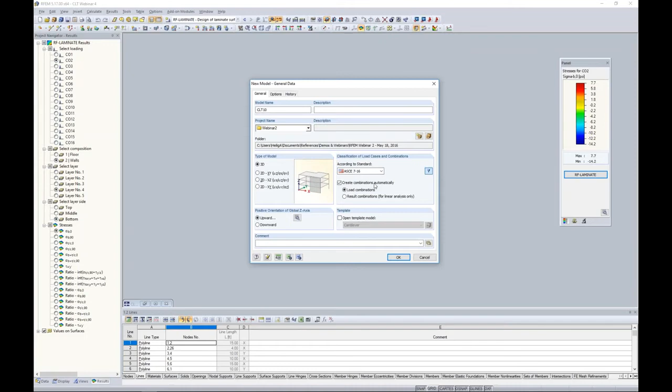With that said, we can immediately jump into our example today. When you first launch RFEM, this is the dialog box you'll essentially see. We need to give it a name, so we can just call this one CLT 10. The load combinations can be generated according to a standard, so you'll notice we have the ASCE 7 2016 here. We also have the NBC 2015, as well as many other international codes. You can always uncheck this option, which will allow you to manually create your load combinations instead. Once we've defined that, we'll go ahead and use the ASCE 7 2016 for our example today.

The program launches our file. We can see in the center portion here is our main graphical window, which is where we'll begin to generate the structure. Down at the bottom, we have our tables. If you prefer to work with the program this way, you can import and export information to and from Microsoft Excel. We have our tools up here at the top, and we'll certainly be utilizing those today. Over on the left, we have our project navigator, so as we begin to generate this model, all of our input data will be available within this project navigator. If we scroll down, here is a long list of all of our add-on modules.

Here's RF-LAMINATE in particular for today. Once we do run an analysis, our results will be available within this project navigator.

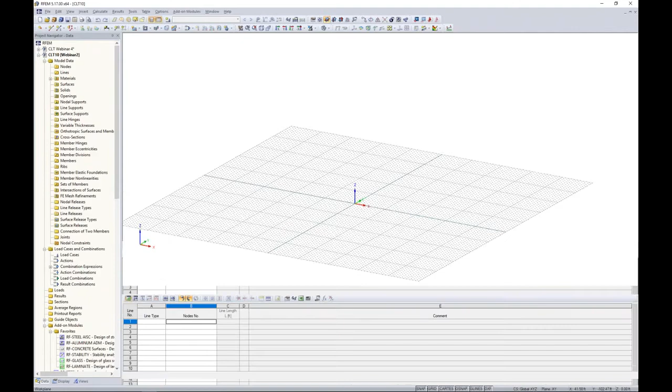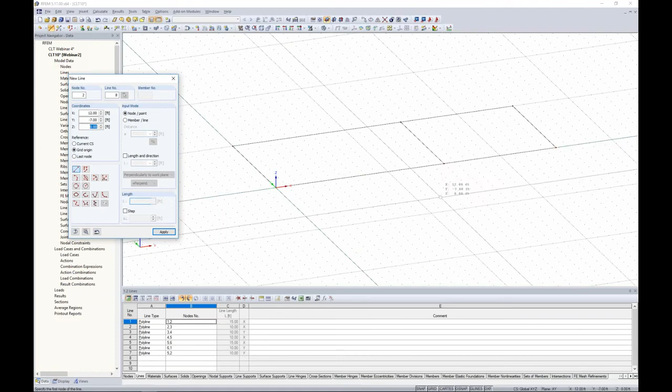To begin with, I want to start off again with just the basic geometry of our structure within the main program here, RFEM. So I'm going to draw a new line element, and it's exactly as you think, just a line element, something you'd see similar in AutoCAD. It doesn't have a cross section assigned. What I'm going to do is give the structure its basic outline here, and we're going to snap to a few different points. Finally, closing this gap, we can right-click, and we can also repeat the new line by right-clicking, and maybe I want to add an intermediate wall here. Once I'm done with that, you can see, again, nothing more than those one-dimensional line elements.

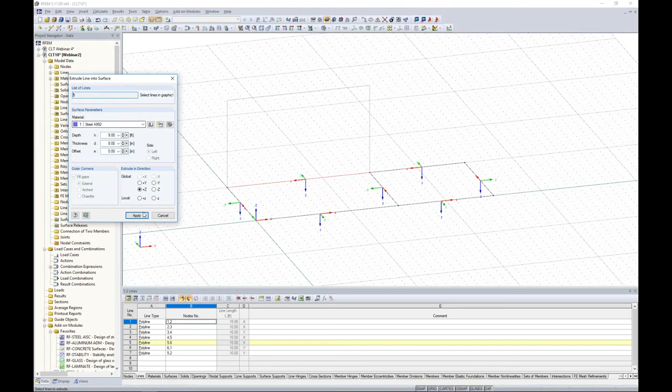Now, what I want to do to create the walls of this structure is right-click on one of these lines, where we have the option to extrude the line into a surface. This would be the 2D surface that makes up my wall element. I can set the height as 9 feet. The thickness and the material don't matter right now. Steel A992 with a thickness of 8 inches is completely fine, because this is just essentially a placeholder—we're going to define our CLT compositions later on in the add-on module RF-LAMINATE. So as a placeholder, we can just leave these as they are. Now you'll notice that 1D line element was created into a 2D surface element. The same thing can be done for the rest of these line elements to quickly create our walls.

By all means, you can draw the surfaces individually as well, which is what we'll go ahead and do for our ceiling elements here for our first level. For this, I can just easily change my drawing grid up to the top of the structure, and I'm going to generate surfaces here. So this time I will draw in those surfaces.

The material again doesn't matter, Steel A992, thickness doesn't matter, it's all going to be overwritten later. So I click OK. Now this allows me just to snap to a couple of points here.

Now I wanted to place two panels side by side just to show you that panels don't necessarily need to span between certain walls, but they can be set up like this for situations where you are not able to span a single panel between walls.

Now, as for our second room over here, I will just create a single surface element and we snap from one point to the other. So that is essentially defining all of the wall and surface floor elements for our first level.

I'd like to go ahead and put in some openings here. Eventually we're going to create a second level, so I'm going to need some type of opening to get from the first level up to the second level with my stairs. Just like we drew in a surface, we can also draw an opening.

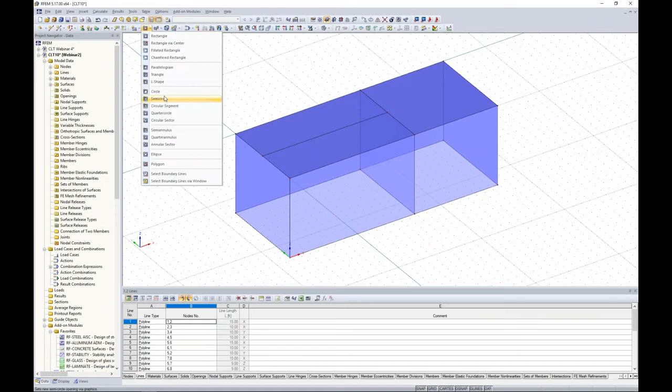In our toolbar up here at the top, you'll notice that we have many different options for shapes of openings. It doesn't necessarily have to be a rectangle, but circles, semicircles, ellipses, or even a polygon to draw the shape yourself is available. For this one, we will just use a typical rectangular shape, and we can go ahead and just snap to a couple of points here to add in that opening for our stairs.

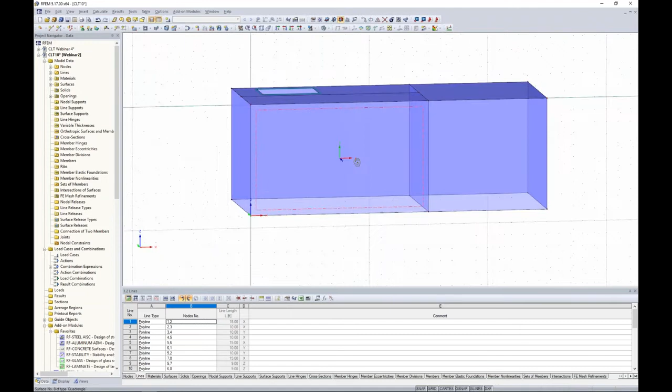Now, as far as the front of the structure, we want to change around our drawing grid here and snap to the front. We'll go ahead and add in an opening for our window to begin with, as well as maybe an opening for a door.

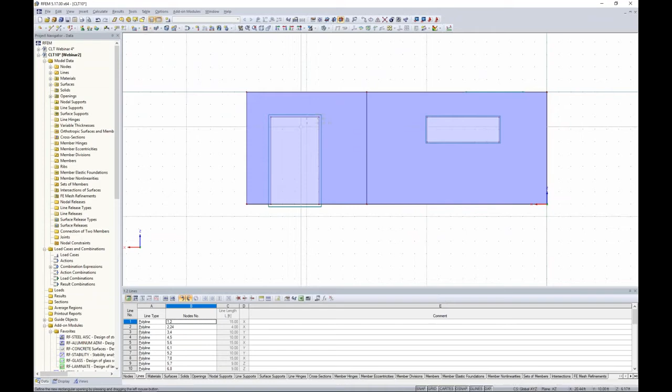So once those two openings are created, we'd like to do something similar to the back of the structure. Once again, just changing that drawing grid to the back, we rotate around the structure and just arbitrarily add in a rectangular opening for the window.

Lastly, we need a way to get in between the two rooms, so we'd like to add a door opening. We'll go ahead and change around the drawing grid once more, snapping to that center point, and then we can add in our opening.

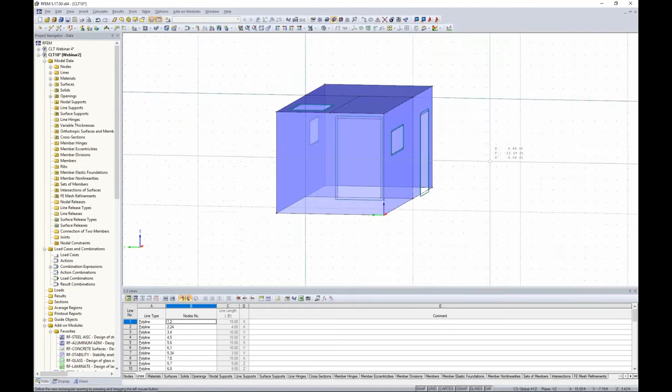You'll notice the benefit of this drawing grid, that it really doesn't matter where I'm snapping to within the model to draw all these openings, but the drawing grid limits me to where those openings are actually placed on the structure. So all of the surfaces are pretty much done.

I'd like to generate a second level with basically the same identical layout. So what we can do is just highlight everything, and we could use our Move Copy tool, but what's nice is we also have our drag and drop feature within the program.

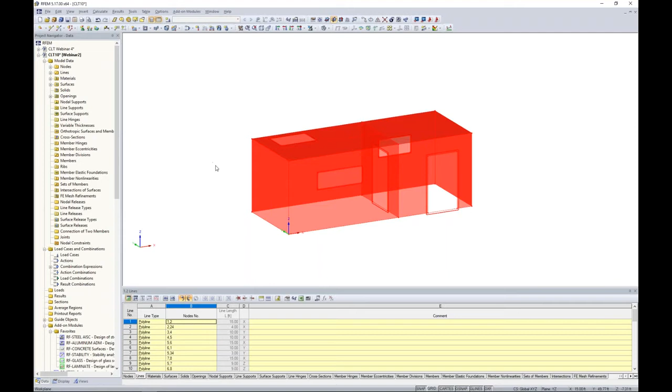So with this, I highlight everything, I hold down my Control key, and then I can snap from one node up to the top to create a copy with that drag and drop. Now you can see everything was copied up to the second level.

Now I do want to delete a couple of these openings. This is probably easiest by turning this into wireframe view. I can zoom in here, select my top opening, just hit the delete key. Now the nodes and lines still remain that made up that opening, and realistically you could leave these in here.

They're not going to affect your analysis, but if you'd just like to keep the model a little bit more clean, we can just go ahead and select those with our selection tool and hit delete on our keyboard. Same thing goes for our opening of our door; we probably don't need this one in here. So again, just highlighting and hitting delete on our keyboard.

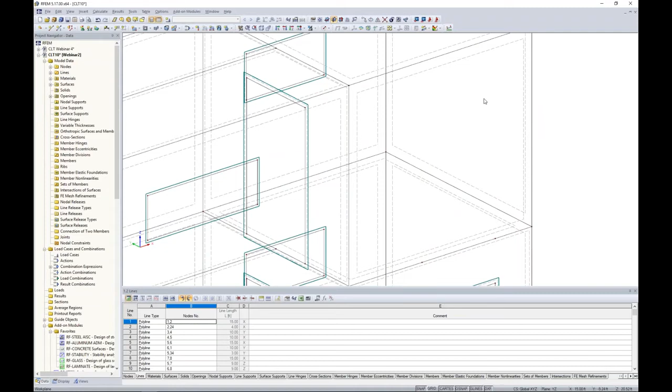So we're now done with all of these surfaces for our simple building today. Now let's say that we'd like to model some type of beam element that will hold up the two panels here. So this is a fairly long span of 15 feet.

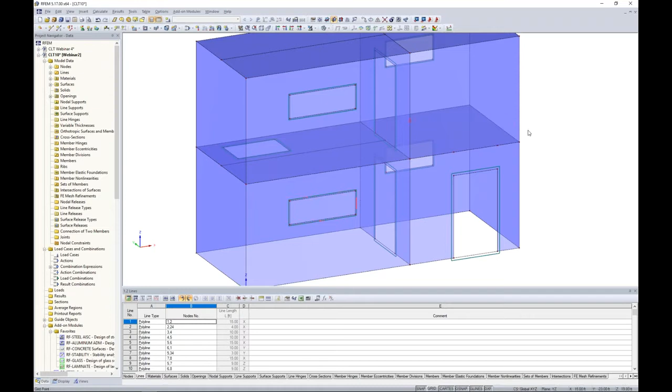Just for example purposes, let me hide this second level here, so we'll change the visibility by hiding the selected objects. So where I want to place that beam is below these two panels that are spanning a little bit longer. So how can we do this?

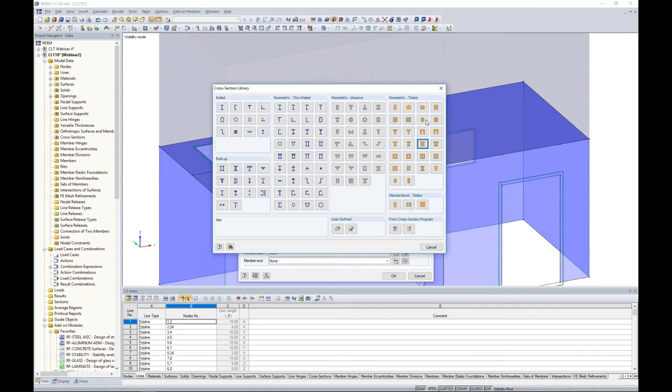Well, we can start off by drawing a new single member. Now the member type is set to beam, and we can launch our cross-section database. Here are all of the different cross-sections available in the program. You'll see all of the sections from the standards, AISC, CSA standards, but in particular today we'll be working with these parametric timber sections.

So we can choose the rectangle, set the width as 6 inches and the depth as 10 inches. The material is also set within this same dialog box.

Now today I want to use a glulam member. So here I can import the material from my library, and over on the left we have some filters. We'd like to filter according to timber. We can choose North America. Here you'll see both the AWC and the CSA.

Then we have our long list of all the materials directly from the NDS standard. You can further filter according to the tables directly from the back of the NDS. For example, glue laminated softwood timber, stressed primarily in bending. We choose that from table 5A. Now our list is a little bit smaller.

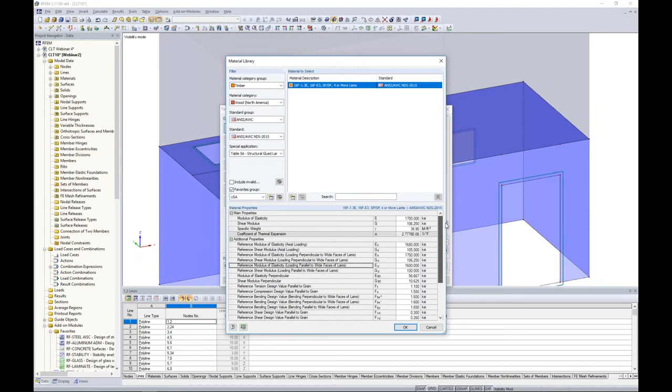You can always create favorites groups, which is just a way to add a handful of materials to a favorites group, so you can quickly access them rather than having to change these filters and sift through these materials every time. For example, I added my material today to my favorites group that I'll be using within the webinar. So here are all my material properties for that particular selection, and I choose OK.

So now we click OK through our dialog boxes, and it's as easy as choosing a point to snap on our structure. Again, the program has nice AutoCAD-like features. The point that is perpendicular to my opposite node will automatically be highlighted, and these are called O-snap settings, something you'd see similar in AutoCAD. So our beam element was created here.

Now, a couple of considerations. We probably don't want to transfer moment from this beam to our plates and vice versa. That would probably cause too much torsion within this beam, and realistically the connection will most likely be screws from the panel down into this beam. So how can we release that moment?

Well, what we can do is to utilize something called a line release. So turning this into wireframe view, let me just break apart this member here so that it's now still spanning as a continuous member, but I broke it up into 2 segments where each panel occurs.

To add in a new line release, we can either do that within our project navigator over here, where you can see line release types, or we can choose it under the insert model data, and then you'll see line release types down here.

So utilizing the project navigator, we right click and choose new line release. Now the program asks us to select the line, so I can choose my first initial line here. Then we choose the line release type. So I create a new type, and you'll see here we have translation, but this is where we want to release that rotation. Now, these axes, X, Y, and Z, are based on the local axes of the line.

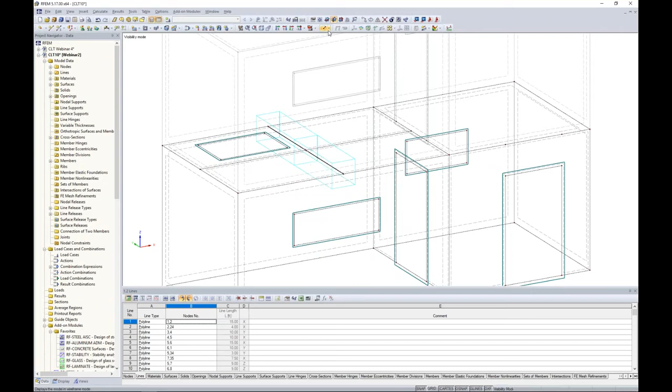The other thing to take a look at is we most likely want to drop this beam element below our surfaces.

We want to account for that eccentricity because it is holding up the beam element or the panels itself. So for this, we can easily select both members for the beam. I double click it, and here is the Options tab.

The Options tab has member eccentricity, and I create a new definition type. What I could do is manually define half the thickness of my panel and half the depth of my beam, and manually put in that eccentricity. But rather, the program's smart enough to do all of that automatically for us.

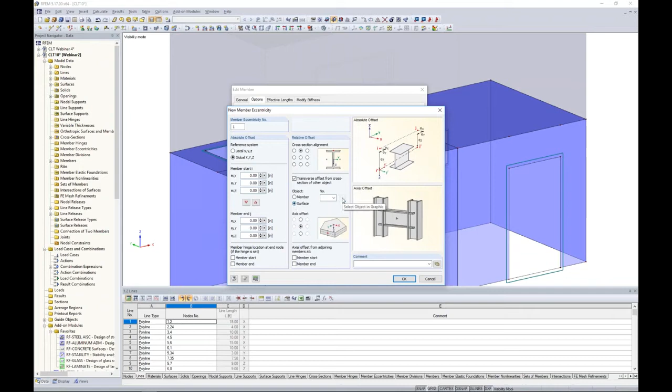So what we can choose here is the top of the beam member point, and we can offset it from the bottom of the surface. I just graphically select one of these surfaces, choose the bottom, and click OK. Now we can see visually that the beam dropped below that panel.

What's nice here is that eventually we're going to change these steel panels to CLT, so our thickness is inevitably going to change too. Instead of having to come back here and adjust the eccentricity, the program will automatically update everything for us.

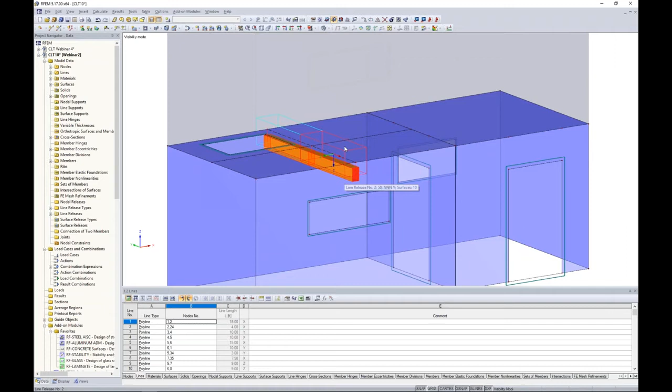Okay, so the basic geometry is now complete. The last thing we need to do before loading the structure is to support it. At the bottom of my walls, I'd like to add in line supports, so once again with our tools up here at the top, I can choose new line support.

We have two default options, hinged or rigid, but we can always create a new line support ourselves. Here you'll see the 6 degrees of freedom, 3 in translation, 3 in rotation. We have the option for partial fixity.

So if you have something that's not fully fixed, not totally released, but somewhere in between, then you'd probably want to add in here a spring constant. And lastly, nonlinearities, which can be extremely useful for wood panels and CLT panels here.

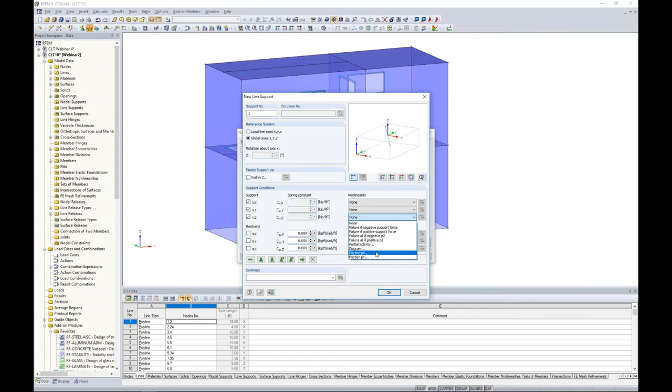The reason why is that maybe in full compression we would like the wall to bear down on the foundation, but with any uplift, maybe we'd like to release those force transfers, and instead model in some hold downs. So that's where those nonlinearities would come into play.

Today, we'll just be utilizing a simple hinged line support, and we can select all of our lines at the bottom of the structure. Now, one thing we want to do is select the two line supports where our door openings are and delete those.

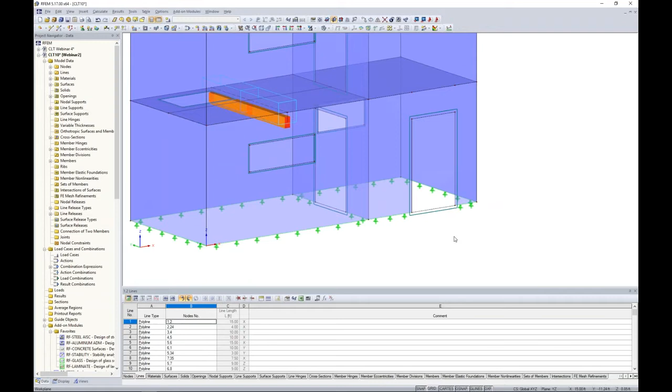The reason why is the program will give us an error just saying that we're trying to support something that really doesn't exist, so we'll preemptively take care of that. So geometry and supporting of the structure is done, and we can move into the basic loads.

For this, I'm going to go into a new load case. Here pops up my Edit Load Cases and Combinations dialog box. The first load case we're going to define is dead load. The action category is set to dead load.

This is important because this is how the program knows which load factors to assign according to the ASCE 7 2016 that we selected at the beginning of the model. The self-weight is automatically activated for dead load.

We create a second load case. We'll call this one live. The action category is set to live. Self-weight is unchecked here since we don't want to account for it twice.

Third load case, we'll call this one wind X with the action category set to wind. And finally, our last load case will be wind Y, with the action category again set to wind.

So the combination expressions tab is just going to show me that I'm going to create both LRFD and ASD load combinations, again, directly from the ASCE 7.

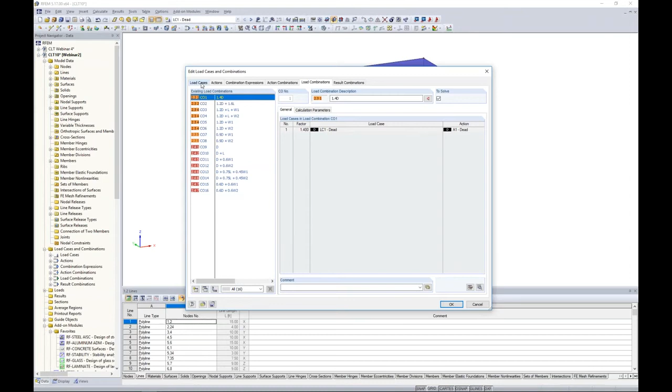The load combinations tab actually lists out the individual combinations. Here are my LRFD load combinations in orange and ASD in red. These only include the load cases I've defined on that first tab, which is dead load, live load, and wind load. I won't see additional load cases such as snow load when I haven't defined them on that first tab.

The result combination is an envelope solution, so we have our LRFD envelope solution here for our first result combination, and the ASD result combination here. This will just show us the max and min out of all of these load combinations combined.

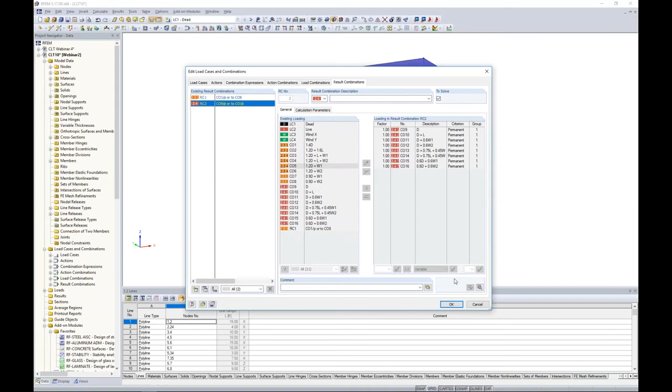So we've completely set up our load cases and our load combinations, but we need to actually place the loads on the structure.

So we'll start off with dead load, and here we'll just apply a basic surface load, once again accessing this tool at the top of our model. The surface load direction will be set in the global Z direction. We can see those global axes here with the magnitude set at negative 0.1 kips per square foot. For this, I can click on those surfaces, or I can highlight the first level here to apply that same load. You'll notice that the openings are automatically considered and our dead load is complete.

Same thing for live load, same concept. We'll go back to our surface loads here and simply change the magnitude to negative 0.05 kips per square foot, and we'll only apply this to the first level here.

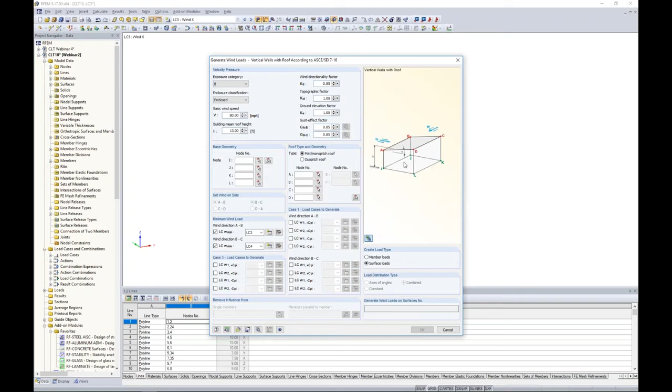Moving on to wind load, under Tools, Generate Loads, for both snow loads and wind loads, we have the option to generate these according to ASCE 7-2016. The wind loads only take into consideration case 1 and case 3 from the standard, and realistically this is for basic rectangular structures only. Anything outside of that, you're going to have to manually apply the loads. This will apply them as either surface loads or member loads to the external elements of the structure.

So it won't be placed on a diaphragm as a nodal load, but rather the actual loads themselves. Keeping with a simple example today, we're going to apply basic surface loads for our wind in the X and Y. Going back to our surface load, all we're doing here is changing the load direction, and the magnitude can be set at 30 pounds per square foot.

Now you can vary the load linearly in the vertical direction. For example, if we want higher wind load at the top and lower wind load at the bottom. These loads don't necessarily have to be applied to the entire surface either. We have free loads, which allow you to apply surface loads to only portions of your surfaces. So the possibilities are really endless when it comes to loading here.

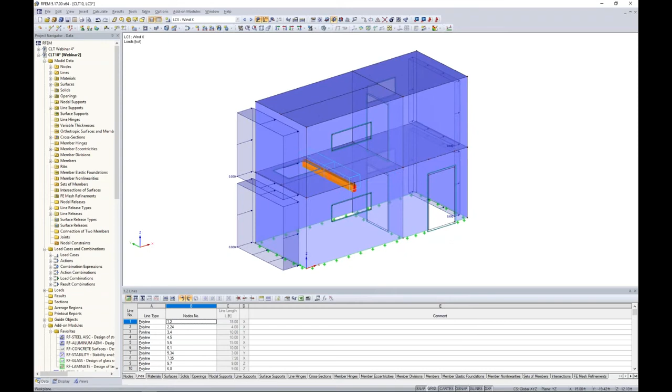So we just apply a basic wind load in the X direction. Now I'd like to maybe have a small suction load on the other side. We'll simply change the magnitude to something more like 10 pounds per square foot and apply that on the other side of our structure. So pretty basic application today.

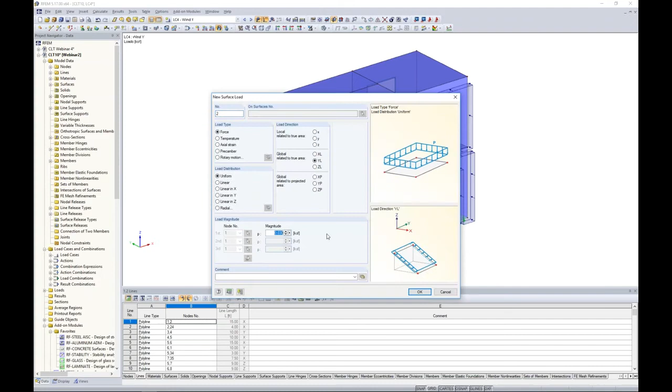Moving on to wind in the Y direction, same concept, just changing the load direction to Y and the magnitude to 30 pounds per square foot. We click on these front surfaces here. Again, you'll notice that the windows and door openings are automatically accounted for. And one more time, a small suction load in the back, 10 pounds per square foot, and we can highlight all of these surfaces at once to apply it to the back side of our structure. So that's the basic loading.

Now we can cycle through these load combinations here to see them all applied at once. What's also nice is that these load factors are automatically considered in the graphical interface here when we're displaying the loads on the structure.

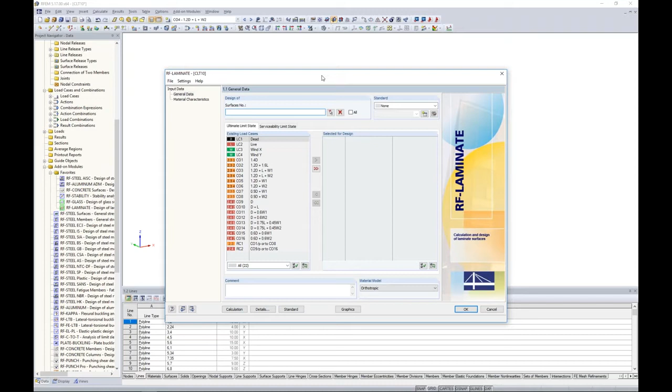So you would think that we must already be ready to run our analysis, but remember, we still have steel surfaces here. We haven't even touched the definition of our CLT panels. So this is where we want to launch the add-on module, RF-LAMINATE. I can access this add-on module within my project navigator, and when we double click it, up pops a dialog box. The add-on modules are nothing more than a dialog box within RFEM. Everything that I've already modeled and loaded so far will be considered. I don't need to redefine any of that information. The only thing I'm defining here is information specific to the NDS standard and to cross-laminated timber.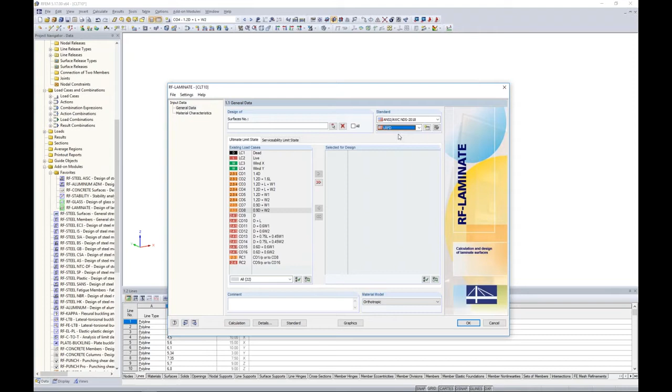So I want to fill out a few things here before I explain what's going on with the RF-LAMINATE add-on module concept. The first thing we'll choose here is design. You'll see the NDS 2015, and as of our last release, we added the NDS 2018. We have both ASD and LRFD. Maybe today we utilize LRFD. Our surfaces, we can choose all the surfaces here, or you could select some graphically if you only wanted to design a few, but for today we're going to design all of them. For our ultimate limit state combinations, we will choose all of our LRFD load combinations, and for serviceability we will choose ASD because again we can check deflections.

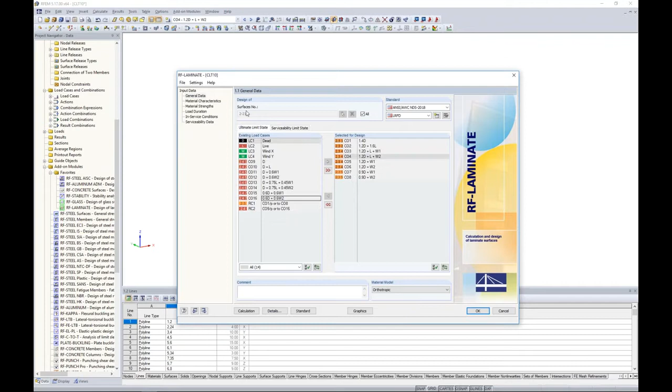So the material characteristics, this is where we define the CLT compositions, those individual layers that make up that CLT panel.

And this is where I want to go back to the PowerPoint to explain what's going on behind the scenes. So with RF-LAMINATE, as I just mentioned, we're going to define each individual layer of that panel.

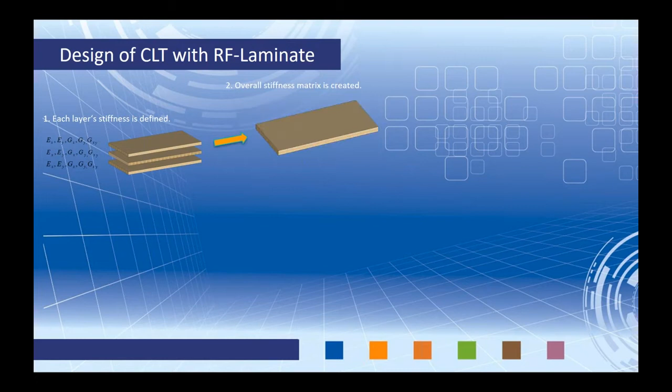And this is where we're going to see CLT panels instead of those steel surfaces that were our placeholder. It's going to run through all of those load cases, load combinations, and eventually we're going to get internal forces.

We're going to compare them to the strengths of our CLT based on the NDS standard, and we're going to give you a design ratio. So that's essentially what's happening underneath the hood.

Now, as far as the 2018 NDS updates, what exactly changed? In reality, there were only two revisions in Chapter 10 for CLT. The first being the format conversion factor K sub F, and this is applicable for the rolling shear design value F sub S within LRFD design.

Within the 2015 standard, this was 2.88, and it was simply adjusted to 2.0. You can see this within Table 10.3.1 of the 2018 standard, and within RF-LAMINATE, when you have the 2018 selected, it will automatically take into account that small change.

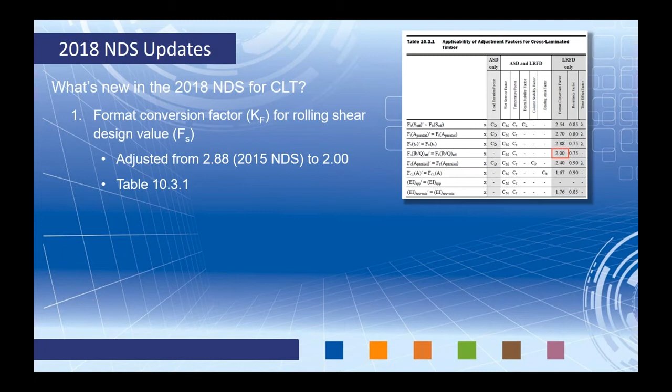As far as the second change, it's actually a little bit more complex. Deflection calculations are run according to section 10.4.1, and what the NDS code tells us is that the apparent bending stiffness must be adjusted to account for shear deformation, and this is what you're seeing here with this equation.

So in order to calculate deflections, we should use this stiffness. This is pretty much an approximate equation, and it's done by reducing the bending stiffness EI with a shear deformation adjustment factor K sub S. So we can see all of that here.

So this equation was slightly modified, and it matches up a little bit more closely to the CLT handbook, but that's really the only second change.

Now, with all of that said, RFEM, or any structural analysis finite element software, really has a hard time knowing what this shear deformation adjustment factor should be. First of all, it's based on the end fixity of our panels, whether it's pinned or fixed, and the loading. So the program doesn't know this criteria. There's no way to determine this.

And what happens when we're outside of some of these elements, like the end fixity is partially fixed, or the loading doesn't necessarily have any one of these in particular, but multiple loading options. So what K sub S value do we use then?

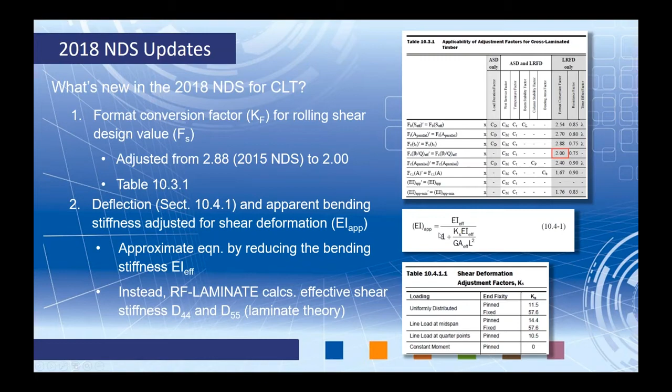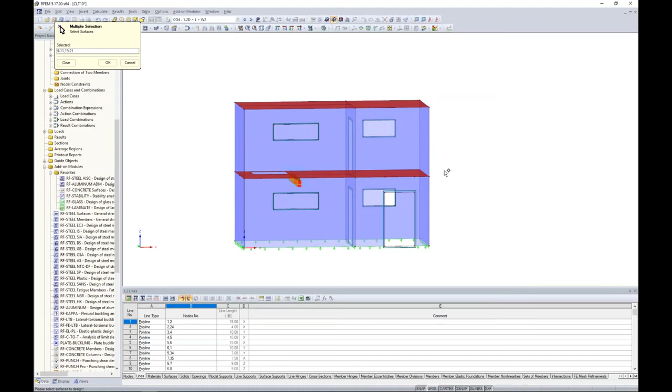Okay, so let's jump back to our example here, and let's begin by defining our first composition. So what we'll first define here are our floor panels. We give this current composition a name. We choose these surfaces, which we can choose them graphically here. We'll choose our roof level and our first floor level, and I click OK.

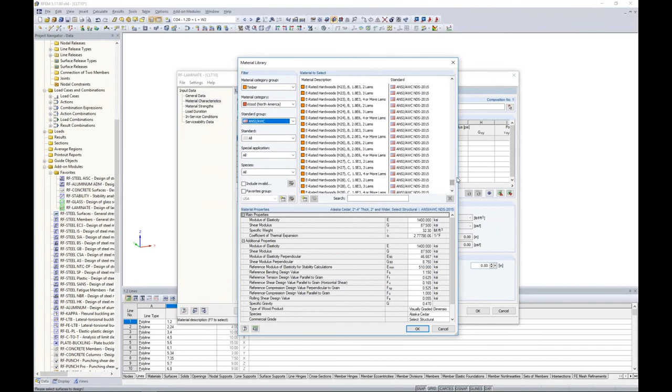Now, as far as the different layers, you can individually choose these layers here by going into our material database, and this is what we saw similar in RFEM. The material category can be set to Wood North America. We have AWC and CSA here, and then we can choose one of these materials that's applicable for our first layer. So that's one way to do it. We can set the thickness, and then all of these properties will be generated automatically from that particular material.

Another option is just to bring in the imported layers from our library. Within this library, you'll see we have a handful of producers that we've reached out to. They gave us their information for their products created for CLT. In particular, for the Canadian and US market, you'll see the APA, Nordic Structures, Structurlam, and SmartLam. You can always import one of these products directly from the manufacturer if you're utilizing one of them.

Who we'll be utilizing today is the APA for the US. Grade E2 is fine, and we will select the thickness as 6 7/8. Now you can see that all of these layers were automatically populated within this dialog box.

If you create your own individual layers, you can always save them and bring them up for a future model within RFEM, so there are a lot of options here. You don't necessarily need to individually define those every time. The modulus of elasticity, shear modulus, specific weight, and everything is automatically populated here, based on the producer we're utilizing. The material strengths are also automatically populated, so here are strengths for bending, tension, compression, and shear.

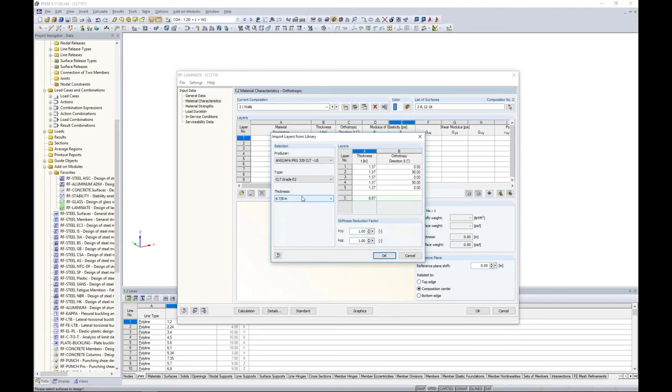That is good for the floor, but we also need to create a second composition for our walls, so we'll call this one walls. For these surfaces, we can graphically select all of our vertical panels here for our walls, and we go back to the add-on module. We populate from this same database, and I'm just going to use the same grade E2, 6 and 7/8, which is fine for our case today. And I click OK.

One thing I'd like to point out is this option here to edit the composition details. This is applicable for both the floors and the walls, and there are quite a few options here to turn on or off or adjust. You'll notice we have consider coupling, cross-laminated timber without glue at the narrow sides, shear failure in the glued contact surfaces, as well as stiffness reduction factors.

To explain all of this, although it looks pretty simple, it's actually fairly complex what's going on once again in the background of RF Laminate. So I'm going to jump back to the PowerPoint to explain some of these settings, and they're incredibly important for us as engineers because we need to input the right information in order to get a correct analysis.

The first option, consider coupling, is automatically turned on by default. The reason why is we're going to make the assumption that these layers are glued to each other at both the top and bottom. You can see here the stress diagram when we are considering coupling, showing normal stresses as well as shear stresses and the stress distribution for coupling behavior. Now, with no coupling, we have really independent behavior for each individual layer, and you can see how this stress distribution looks quite different. So that's why we make the assumption you probably want those layers glued, but if not, you can always uncheck this to consider the coupling.

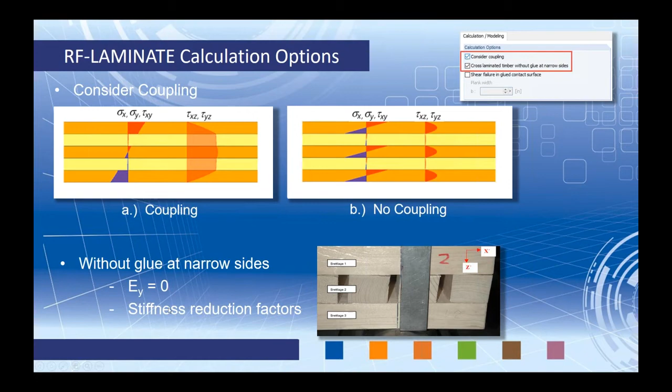With that said, those stiffness reduction factors also need to be adjusted, which takes us to our next slide. Without glue at the narrow sides, it is strongly recommended that your K33 and K88 stiffness reduction factors be modified. This is for torsional stiffness, K33, and K88 is for our in-plane stiffness. What's interesting is that the NDS and the CLT handbook really don't give much information on how these should be reduced when we don't have glue at the narrow sides. So I went ahead and pulled this information from the Austrian Annex, which is the Eurocode EC5.

I think we all can admit that Europe is a little bit more advanced when it comes to CLT design, simply because it's been around a lot longer than what we've seen within the US or Canada. So I think it's perfectly fine to refer to the Eurocode when there's portions in the NDS or CSA that maybe aren't so complete.

So within the Austrian Annex, we have some simple equations here for K33, K88, those stiffness reduction factors. This is an Excel file I got from one of my colleagues, and what this allows us to do is simply put in the total thickness of our panel, the number of layers, the board width, and then out pops these calculations for K33. So this is the value we want to put back into RF laminate when we are not considering glue at the narrow sides. Same thing goes for K88 here.

So by default, these are set to 1.0 even when you have this option checked, and that's simply because there isn't any guidance given to us within the NDS standard. So again, it's strongly recommended to make sure you reduce those stiffnesses.

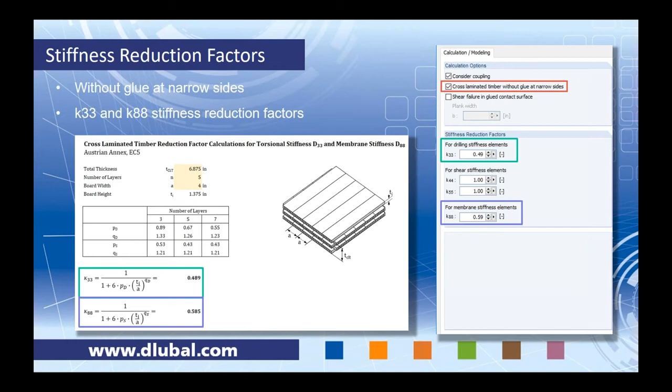Okay, as far as the other two stiffnesses, K44 and K55, I want to briefly touch on this. These are actually not stiffnesses you'll probably be adjusting. The reason is that the CLT shear stiffness is calculated according to the laminate theory, which I mentioned with our deflection checks that were new within the 2018 NDS. With this, we're going to apply a shear correction coefficient. In turn, the CLT handbook actually utilizes the shear analogy method, which is different than the laminate method. Both of them eventually come up with a reduced shear stiffness, and that's ultimately what matters.

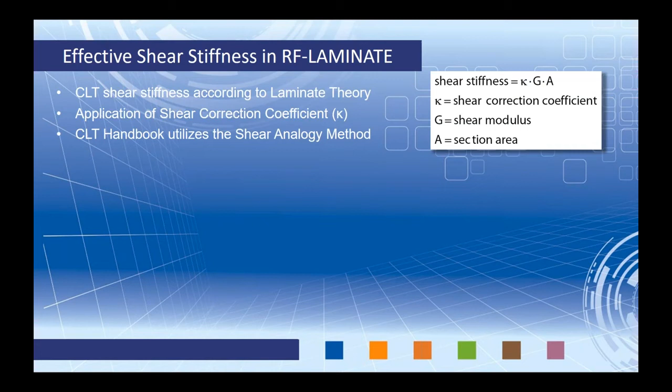So either one, by theory, is probably considered fine, but within RF laminate, we're going to use the laminate theory. Here we're going to apply the shear correction coefficient to our shear stiffness, G and A. Now, when we're looking at a homogeneous rectangular section, it's pretty common to set this shear correction coefficient to 0.8. We can see the shear stress distribution as a parabolic type function. Well, with CLT, we don't have that parabolic type function because it's not a homogeneous section.

Therefore, through research, there are some recommendations on what to use for that shear correction coefficient, whether it's 3, 5, 7, or 9 layers. We have some ranges here to set that to. But the question is, if I have 5 layers, like my example today, what exactly do I set this factor to within this range? Either the low end, the high end. What happens if I have 11 layers? What do I use then?

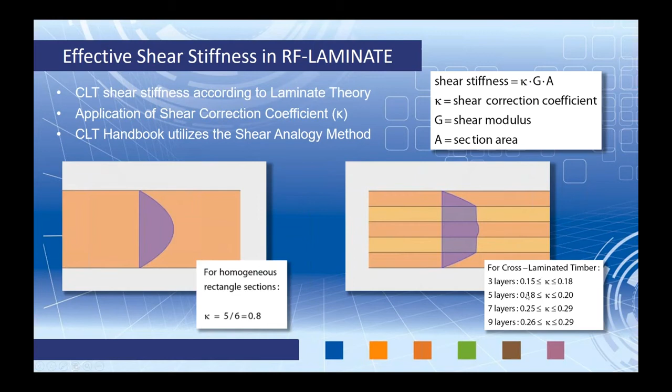So we will actually take you to the next slide to show you how these shear stiffness calculations for the XZ and YZ directions are calculated according to general technical regulations. Here are the equations for the shear correction coefficient, and we can see how that shear correction coefficient comes into play when calculating the D44 and D55 stiffness matrix entries within the CLT panel.

Now, within RF laminate, here are the complex equations that go into calculating D44 and D55. This is how the module is calculating those stiffnesses. This is all within our help manual within RF laminate, so you do have access to all these equations and the theory behind the module. But the point is that I will show you in just a minute how you get the values of these D44 and D55, and you can back calculate to eventually come up with what the shear correction coefficient actually is for that particular panel. All of that is done automatically, and this is why I say you rarely will need to adjust the shear adjustment factors for K44 and K55, because it's already being done underneath the hood.

Finally, the last option that we have here is shear failure in glued contact surface. This is for a new torsion check, which was just added into the program within our last release, and this is mainly for wall elements which are loaded in plane. I think we can imagine with gravity loads and wall elements how torsion could potentially be a concern. It's considered without glue at the narrow sides again. One suggestion here is to make sure that we set our FE mesh within our model to approximately the same size as our board or plank widths. We'll be doing that a little bit later on in our example, but it's important because your results could be a little bit skewed if you choose an FE mesh too small or too big.

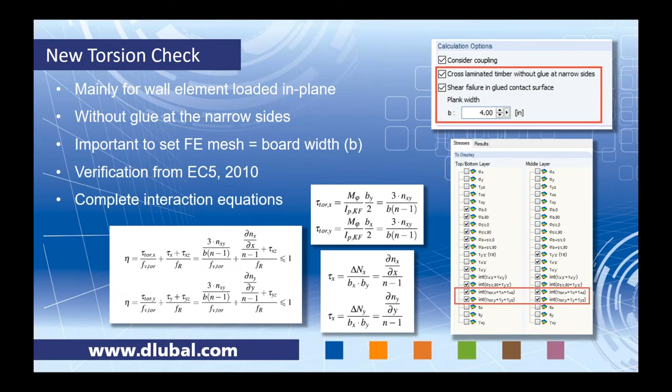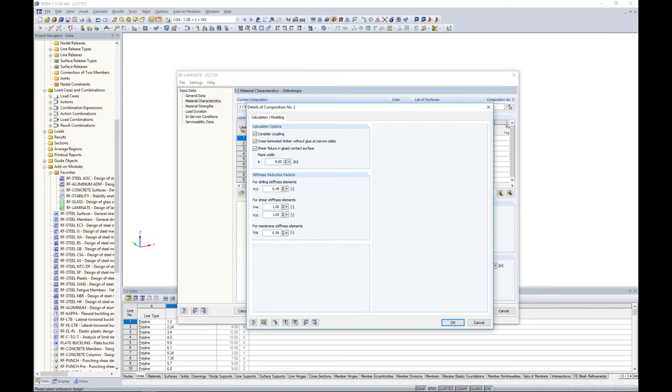Okay, so we're finally ready to jump back to our example, and here we are back to that original dialog box. I'd like to set the plank widths to 4 inches, and for my walls I want to reduce that stiffness to 0.49 for torsion and 0.59 for my in-plane stiffness, based on the PowerPoint I just went over, and I click OK.

So for my walls, I've only made those changes to the walls. My floors, which we can pull up here, remain unchanged — I'm not applying those stiffness reductions. But for each individual layer, I can view its stiffness matrix here.

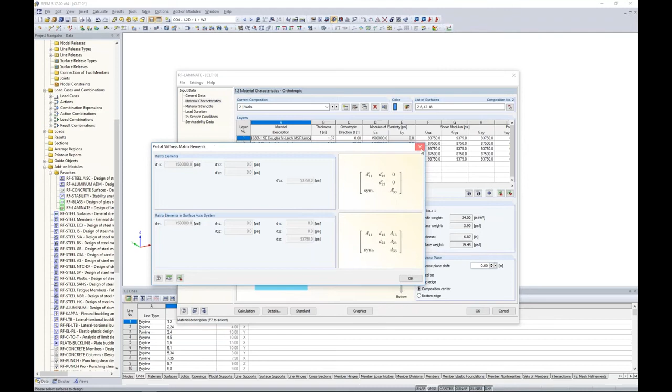Just like I mentioned, the program is automatically creating my global stiffness matrix for the entire panel. Here's my D44 and D55 entries that I mentioned. You can eventually back calculate to see what that shear correction coefficient is, but everything is done underneath the hood, taking into account those adjustment factors.

As I mentioned, let's take a look at the material strengths here. Because we're now taking into account torsion, we'll see a torsion strength added to our material strengths table. This is something maybe you want to get from the manufacturer — this is just some arbitrary value. It's not something that came from the manufacturers that we populated from these layers, because we don't have that information, but rather it's something you need to manually fill in. Everything else should be good to go.

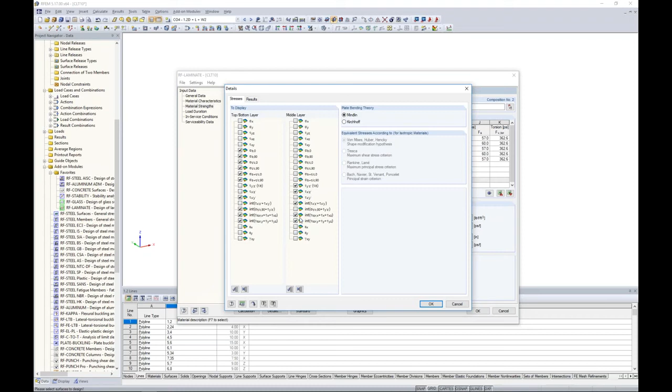Finally, under the details button, this is where I said you may want to activate the results for torsion. If we're checking for it, we want to see what that design ratio is, so turn those on, and those will be seen in the results.

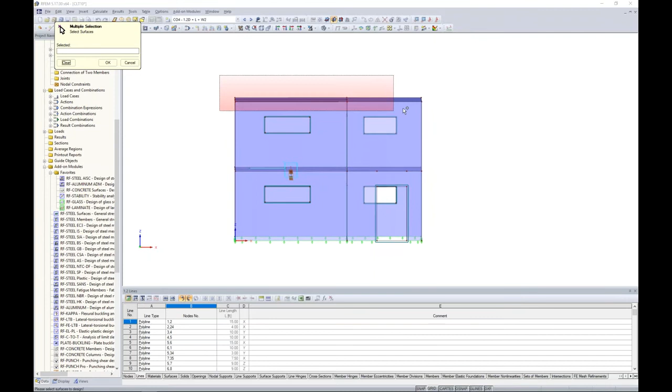Moving on down our list, we have our load duration — this is for load duration factors directly from the NDS standard. We have in-service conditions: is our panel dry, is it wet, what's the temperature? And finally serviceability, so we can check deflections for these CLT panels as well. What I can do here is I'm probably most interested in my roof panels and my first floor panels for my deflection checks. I click OK.

The reference length — what is this referring to? Under the standard button, we see serviceability limits, and this is our limiting deflection ratio. L over 360 is used for simply supported, and L over 180 for cantilevers. By all means you can adjust these, they're just default values. So this is the L we're referring to here. Either you can use the minimum boundary line of the surface, the maximum, or some user-defined length. Today we can just use the maximum, for example, of 15 feet.

So we're almost ready to run the calculation, but there's a couple more things we need to take care of. Jumping back to the material characteristics, this is my wall composition, and we have 5 layers. The orthotropic direction here is in reference to the local x-axes of my panels, so I have layers 1, 3, and 5, which are oriented 0 degrees from my local x-axis. This is most certainly the strong axis of my panel.

I probably want to make sure that the panels are oriented with the local x-axis in the vertical direction to take those gravity loads. Otherwise, we're not getting as full use as we could out of those panels if we orient it so that our strong axis is in the horizontal direction.

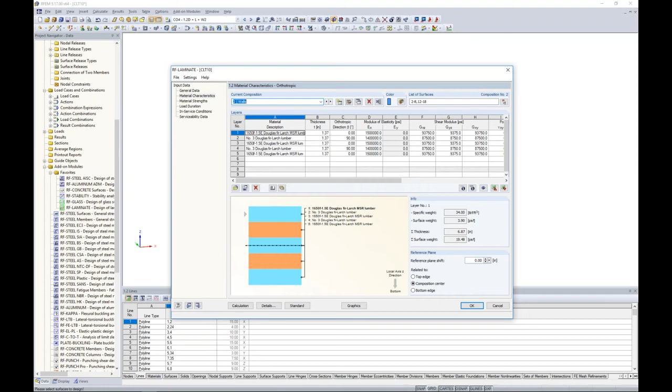So how do we check this? Well, we can go back into RFEM, and the first thing to notice is that our panels are no longer purple for steel. If we double click on them, they're now considered with the stiffness laminate, and we can see the material is now set to RF laminate.

So I can right click on any one of these surfaces to display the local axes, and I zoom in here. Well, the local x-axis is exactly what we don't want it to be. The strong orientation is facing horizontal right now. We want to rotate that 90 degrees so that strong orientation of the panel can take those gravity loads.

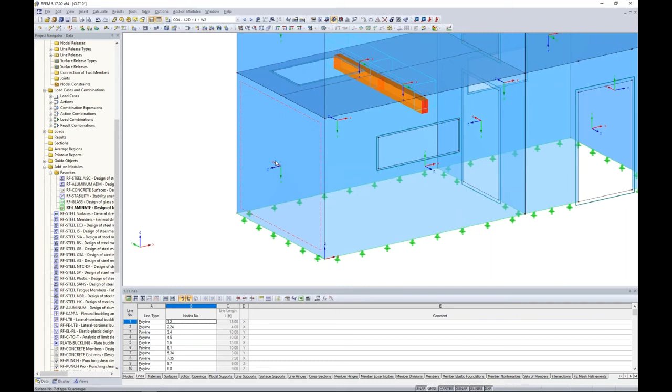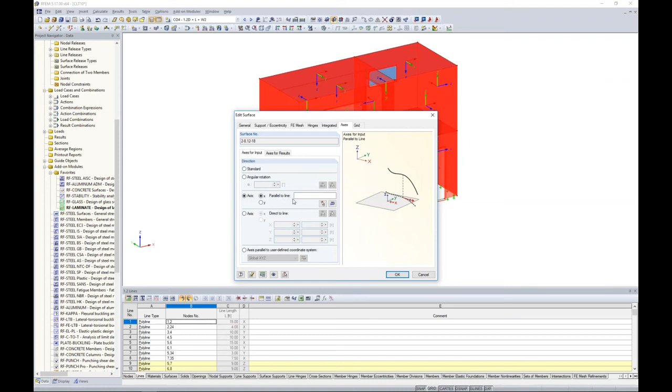So how do I quickly rotate all these panels? For this, I can select all of my wall surfaces and double click on them. We have a tab called Axes. This allows me to change all of my local x-axes parallel to a line that I simply choose in the model. So it's any arbitrary line, and maybe I choose this one in the center because it runs from the bottom to the top. I choose it, click OK, then OK once again, and now all of my panels are facing in the vertical direction with the local x-axes, so the strong orientation is now taking on those gravity loads.

So it's incredibly important which orientation our panels are facing. The other thing many of you are probably thinking of right now is that we currently have fully fixed connections between all of these CLT panels. Well, we all know with CLT that this is definitely not the case. Rather, we're going to screw these panels together.

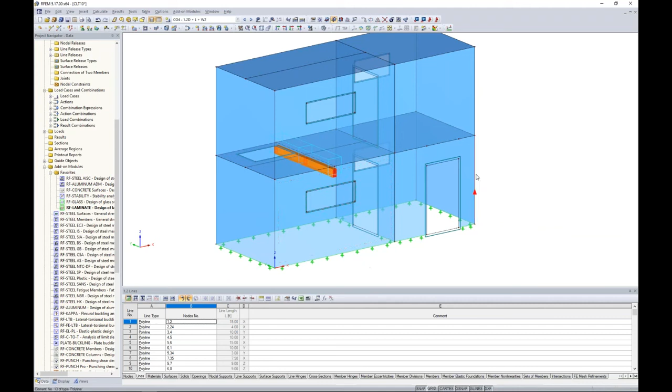And with screws, we want to release the moment. We also want to account for some slip of the screws, maybe at this location in the vertical direction we have some movement. So how do we account for the CLT connection from one panel to the next?

Well, we'll do this with something called a line hinge. Now, a line hinge can be accessed here in our project navigator, or again under model data, insert line hinges assigned to lines graphically. Line hinges are similar to our line releases, which we applied to our members, but they're also different - we're actually going to modify the FE mesh elements at this location of the line hinge.

So meaning if we want to release the moment, we're going to set the stiffness of the FE mesh at that particular point to something very, very small so that we're not going to see the bending moment. Whereas a line release is exactly what it sounds like - it's completely releasing and not adjusting the stiffness of the FE mesh.

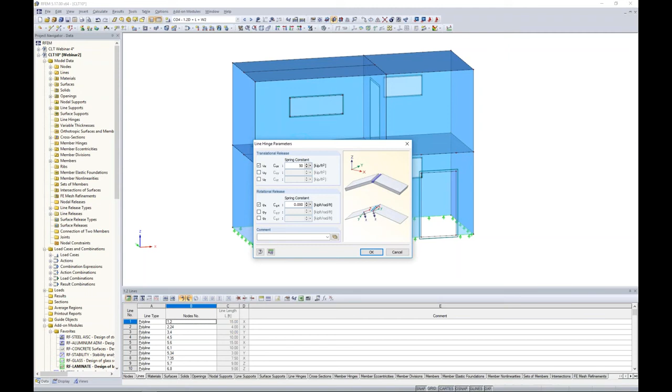So as far as the line hinge definition, it looks similar to a line release. We want to fully release the moment here. Again, these are based on the local axes of our line element, not of the panels. We also want to account for some slip, so along the local x-axis of our line element we can put in a spring constant of 50 kips per square foot. So now we're going to get some movement along the line length, and I click OK.

I'm going to choose the option to select the surfaces and have the program automatically assign the lines - I think this is quickest. So I'm just going to make a selection of some of my panels, and I'm being a little selective, which will make sense in just a minute. I click OK, and we apply those line hinges. We can now see the line hinge symbol within the program.

So when I zoom in to the line hinge location of these two panels, what I see is hinges on both sides. Now, with any finite element software, whether it's RFEM or anything else, if we have two beam members framing into a joint, and those are the only two beam members that exist, and we set the end rotation of both beams to be released for moment, we're going to get an instability. You never want to set both beams to pin in that case - you want to leave at least one fully fixed.

Otherwise we get instabilities and issues within the program. Well, the same thing goes for panels - at these locations we want to have at least one fully fixed panel.

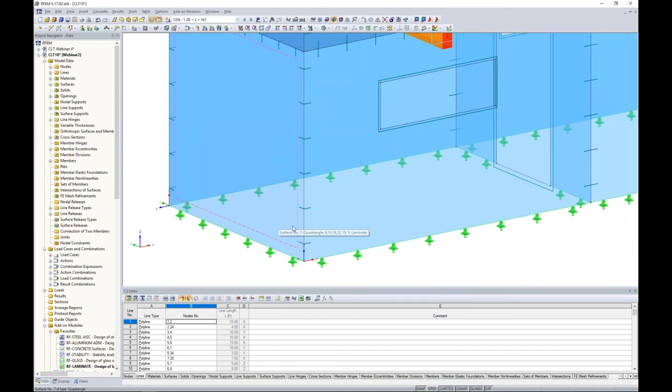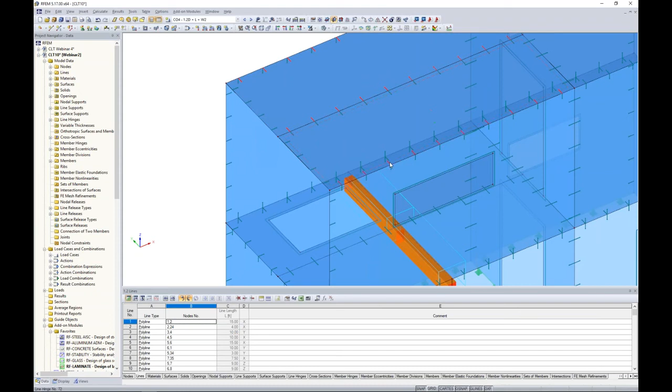So this is why I can hold down my control key to select some of these line hinges and hit delete on my keyboard, and as we see, we only have one line hinge defined at that joint. Same thing goes for the other side. We select some of these locations where we have too many line hinges defined, and up at the top, same thing.

Otherwise, we want to avoid those instabilities. Holding down my control key, I'm just deleting some of them, and finally over here on the right hand side. That takes care of the roof element, but we also want to select our second level here. We'll hide the visibility of that level, and we want to make sure that we address the line hinges at this ceiling level. We'll just select them graphically, because otherwise we have too many line hinges defined. Hit delete, and one more time on the far end here.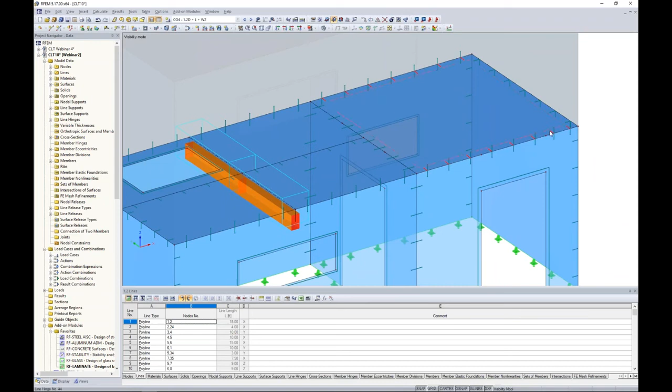Okay, so now we have completely finished the geometry of this structure. Loading, we've defined our CLT panels, so we're finally ready to run the analysis. Now, actually, one more thing I forgot.

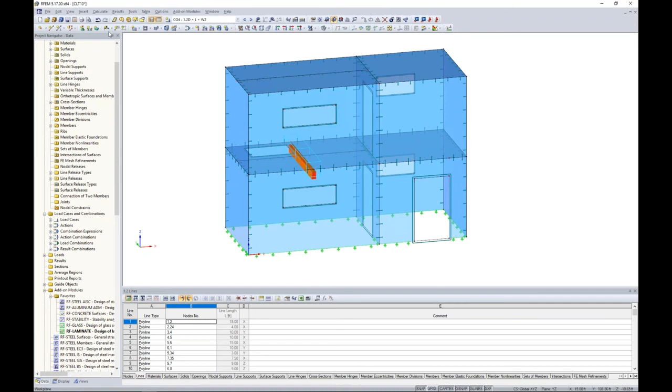Remember within the PowerPoint, I said that we should really set the FE mesh for torsion, when doing torsion checks, approximately equal to the plank width for each individual CLT layer. So for my wall elements, I need to adjust my FE mesh. We do have FE mesh refinements in the program, so I can individually change each wall panel's FE mesh. FE mesh refinements are also available for line elements, nodes, anything of the sort. But instead, under Calculate FE Mesh Settings, we can just change the global FE mesh, which by default is set at 1, to something more like 4 inches, because that's the width of my planks.

We can regenerate the FE mesh just to see how it looks, and the program does everything automatically for us. Everything's tying into nodes, openings, panels, and line releases automatically. If we make any changes, the program will automatically do this every time we run a calculation. So quite powerful when it comes to finite element capabilities.

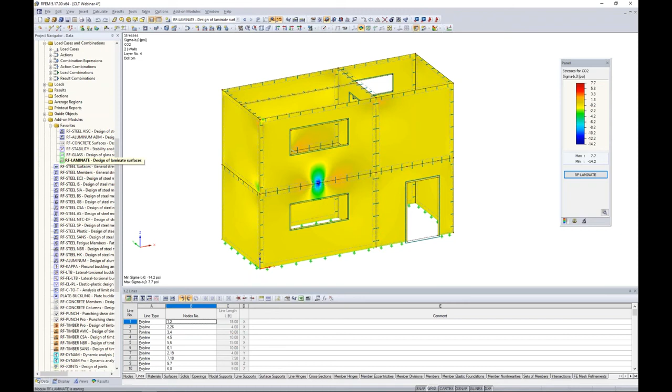So now we truly are ready to run the analysis, and we can go back into RF-LAMINATE if we'd like to run the calculation here. Now, because I have slimmed down the FE mesh a little bit, this actually does take just a minute to run, so I wanted to jump to an already saved model here where we can launch RF-LAMINATE. This will take just a second to load all of the results. So it doesn't take too long, it just takes a minute.

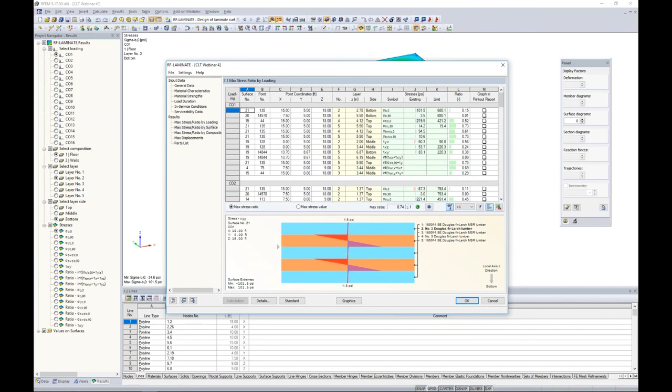You can see here it's having trouble pulling up all the results, but eventually, here we are. We're presented with the results within RF-LAMINATE. So after you run the calculation, you're going to see your results tabs available here, results tables. We can view the max stress ratio by loading, by surface, or by composition.

Maybe if we take a look at the results by surface, and I drag down my table, you'll notice that everything is synced up in the background. What the program's doing is it's actually highlighting the surface that I'm currently looking at in the table. And it also has this big red arrow, showing me exactly where the controlling internal forces for that stress check are located.

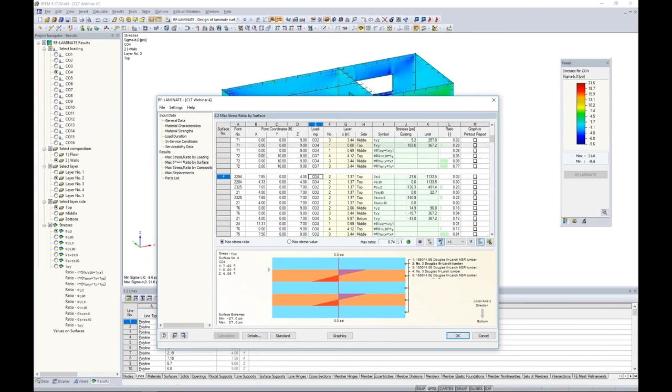In addition, we can view this table here for surface number 4. We can view bending stresses, tension and compression, and shear. Here is the stress distribution throughout the cross-section of our CLT panel. And finally, you'll notice here that we have torsion checks as well for all of our wall elements. So for any one of these, we can scroll through and see the details of the stresses.

Now, we're ultimately getting a max ratio check here of 0.74. We have a nice green smiley face because it's telling me that, okay, everything passes with all of these CLT panels according to the NDS standard, and we're below 1.0. We can always export any of this information directly to Microsoft Excel if we'd like to further sort it.

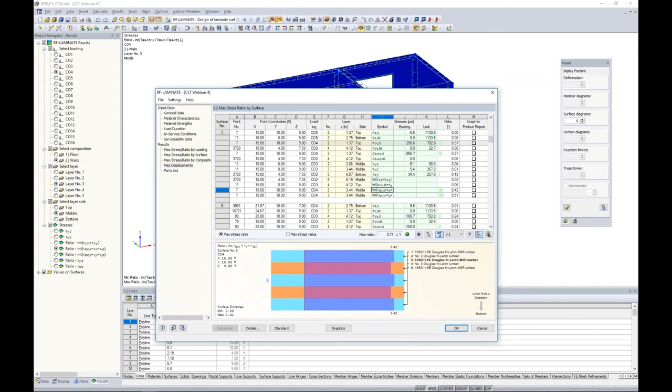Now, this is all included within the printout report as well. So taking a look at the rest of the tables, the max displacements, we're also doing a deflection check. Here are my deflections based on the analysis from the load combinations I've selected. Here is my limiting deflection, which is for my limiting deflection ratio, L/360 is what I set it over. So my limiting deflection is 0.5 inches. We get a different deflection ratio check here, 0.7, again below 1.0, so we're seeing our green happy face.

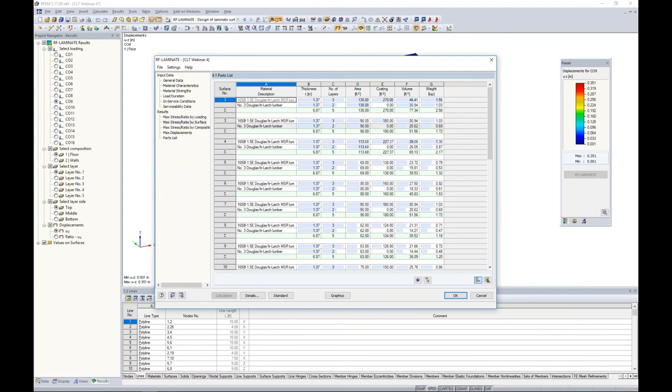Lastly, we see a parts list, which is nothing more than a material takeoff. You can export this information to Excel. So these tables are very informational. Under the details tab, this is where you can turn on and off some of the different stresses that you're interested in.

But it's also nice to see our information graphically as well. So for this, we can always jump to the graphics view here. Technically, I'm still within the RF-LAMINATE add-on module, but I'm viewing my results graphically within RFEM. This allows me to see all of my load combinations that I've solved for, both LRFD and ASD load combinations. We can easily jump to any one of these load combinations within our project navigator here.

Now, the composition, we can either choose our floors to easily view this, or we can choose our walls here. In addition to that, we can view the 5 different layers. Remember, we have 5 layers that compose these CLT panels, so we can view the stresses within each individual layer. Even more so, we can view the top, middle, and bottom of each layer.

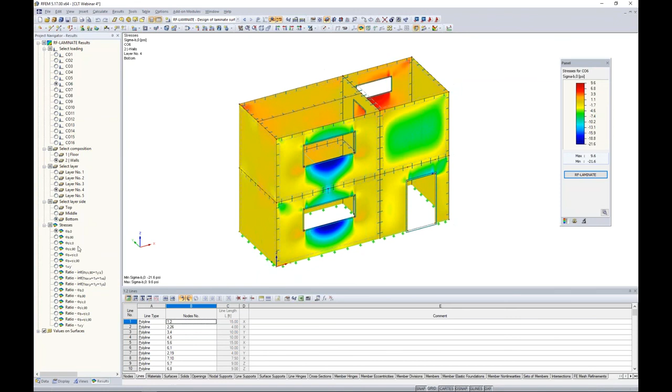So very, very detailed when it comes to all of the information that we provide you within the results for RF-LAMINATE. Even more so, here are all my stresses available to me. We have bending stresses. We have some higher bending stresses where our openings are. This makes sense. We can view tension and compression, shear, and so on. Then all of our ratios will be available for these walls, fairly low ratios.

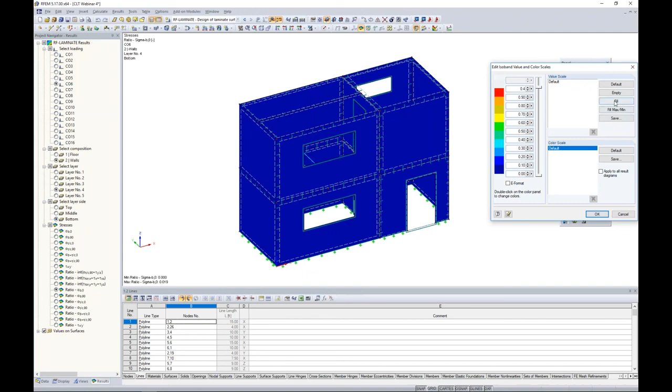Now, keep in mind for any of these checks here, we can always adjust our panel by double clicking on it, and maybe we're interested in any ratios that are 0.4 and lower. We can fill this in, we click OK, and then automatically the program will adjust those ratios based on our new panel here.

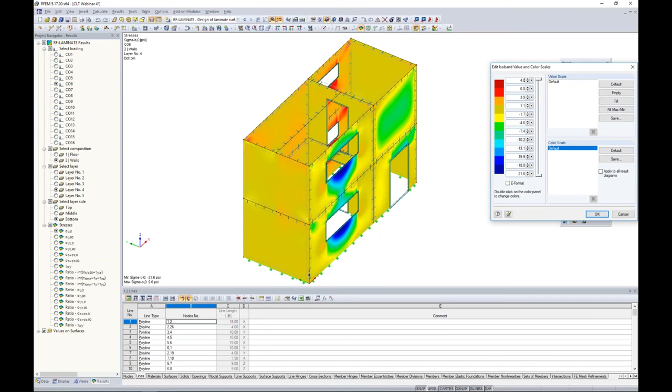This one actually might be a better example. We can change these stresses here. Maybe we're just interested in not quite 9.6, that's a little too high, but maybe we want 4.0. We choose the fill button, we click OK, and now we can see how that panel was adjusted here.

All this information can be printed out directly to the printout report. You can choose mass printing, so that way we can print off all of these load combinations at once, for example, the bending stresses, added to the printout report, and then you can print that off either as a PDF or to your printer. So that's essentially CLT design within the program, including RFEM, the main program, and the add-on module.